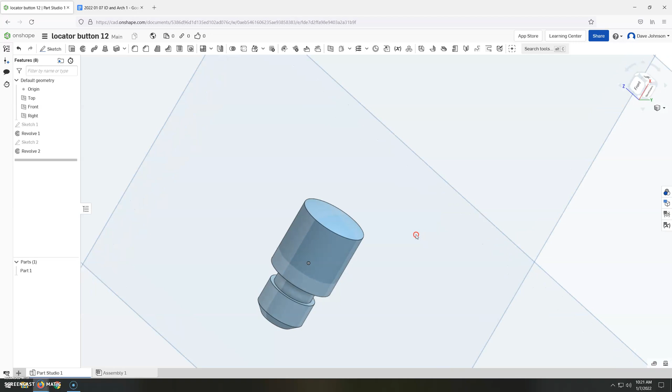So when you first start drawing it, if it looks small, that's okay, just zoom in. But let's take a quick look at our dimensions here. Now this is a cylindrical part, so when we draw it, we're actually only going to draw half of it, along the center line. We're only going to be drawing the outside portion, none of these internal lines. So basically, if you just follow the outside profile, we'll draw that, and then we use the Revolve Tool. Let's see what that looks like in practice in OnShape.

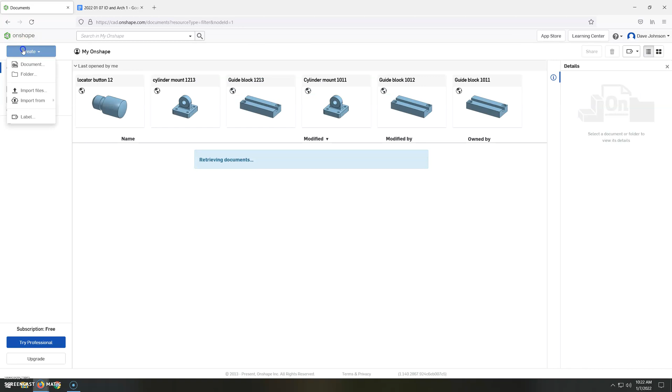So if we go back to OnShape, we'll create a new document. Locator button demo.

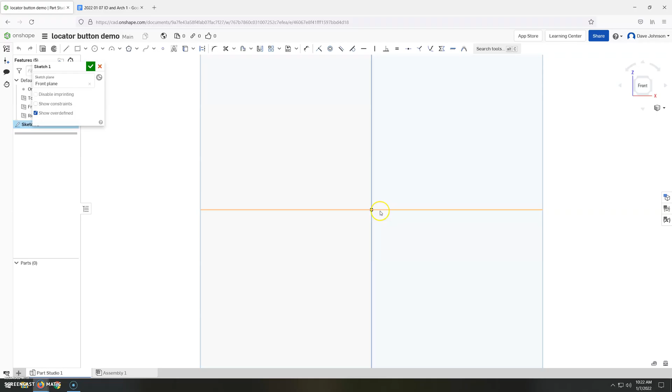Alright, I'm just going to start drawing this right on the front plane. New sketch there. And I like to actually, this one in particular, we're going to line up with the origin point here, but we'll do that kind of after we do our initial drawing.

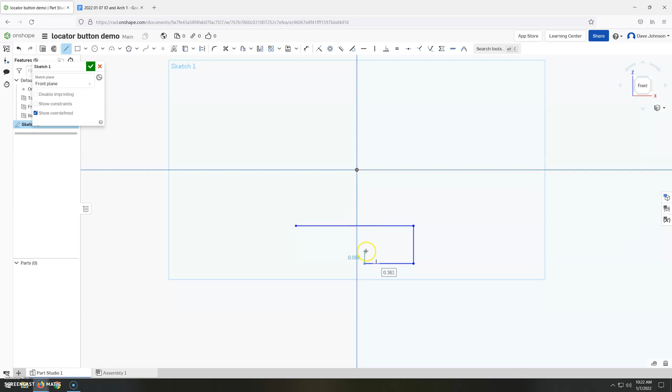So I'm just going to start by just drawing a line, and we'll draw a short line down. I'm kind of drawing this roughly to scale, but you don't have to. Just be aware of accidentally lining up with your origin point here. That's why we're doing this up here for now, and then we will kind of fix things later on.

Go here and here, and we'll come up at an angle, and we'll go straight up. Obviously, I've got a little bit of extra material here. We can just kind of snip that off with the trim tool.

Okay, and then we'll just start dimensioning this. You'll notice I left the curve off the end. We're actually going to add that as a secondary revolve.

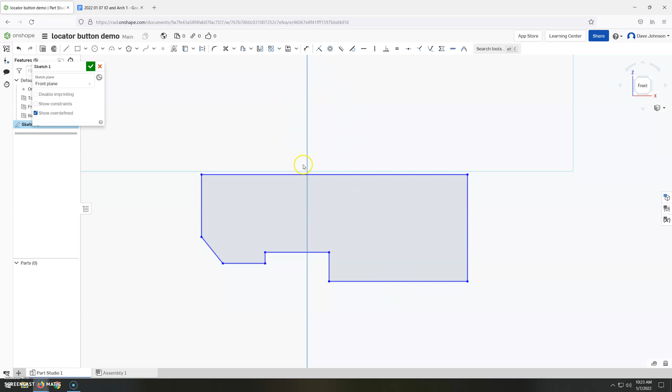So let's start dimensioning this. So our total length here is going to be 7/8 of an inch, and we can get that from this part of our drawing.

Now, the diameter of this whole thing is 1/2 inch, but we're only drawing half of it, so each of these numbers, 1/2 inch diameter there, 5/16 diameter there, 3/8 diameter there, each of those numbers we need to cut in half to give it a radius.

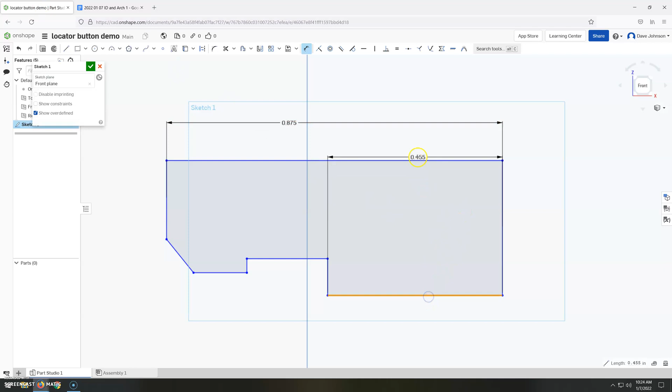So we'll just enter some of those fractions. So here to here, 1/2 of a 1/2 is 1/4, 0.25. Right here, this is going to be 5/32 of an inch. And then that last one is 3/8, so that's going to be 3/16 of an inch.

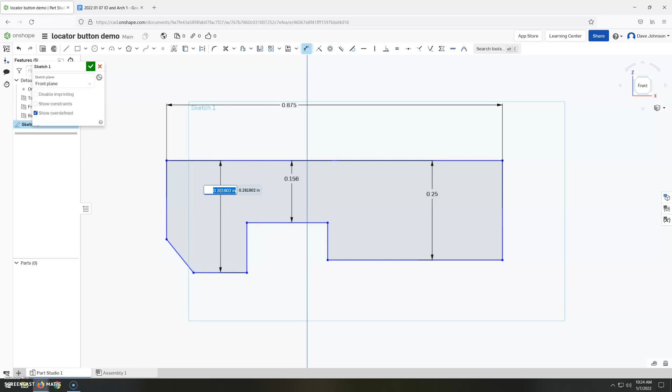All right, you can see that pulled that down. Now, next we want to set this angle. So we look, this is a 45-degree angle, so that means that the supplementary angle to that is 135 degrees, which is much easier to draw than this 45 without a reference line.

So we'll just click this line and then click this line. And what happens is when angles are not collinear or perpendicular to each other, we get this little angle measurement, and we can set that to 135.

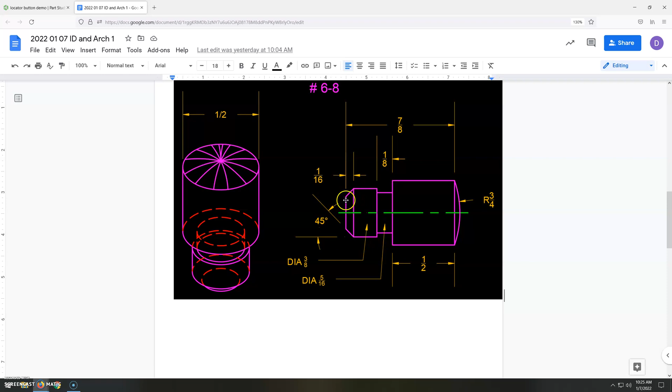Okay. Now we're going to set our distances left to right. So we'll start off with 7/8 inch, and then we've got 1/8 of an inch in this middle segment here. There's nothing here. However, we have 1/16 on our tapered segment there. So 1/2 inch, 1/8 of an inch, and 1/16.

So here, this will be 1/2 inch. This will be 1/8 of an inch, 0.125. We don't know the length of this line, but what we do know is from this point, not line, to this front edge line is 1/16. Okay, and that sort of sets everything up. Everything is locked in now.

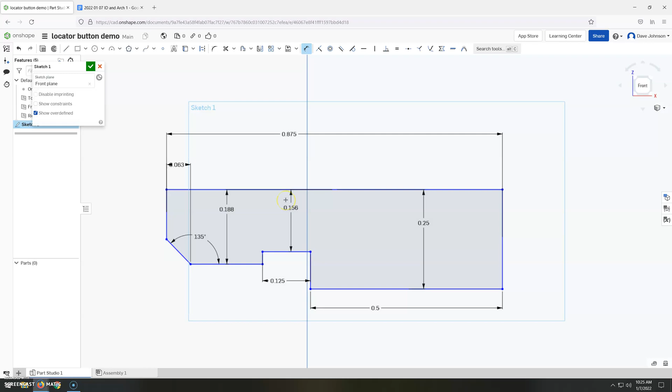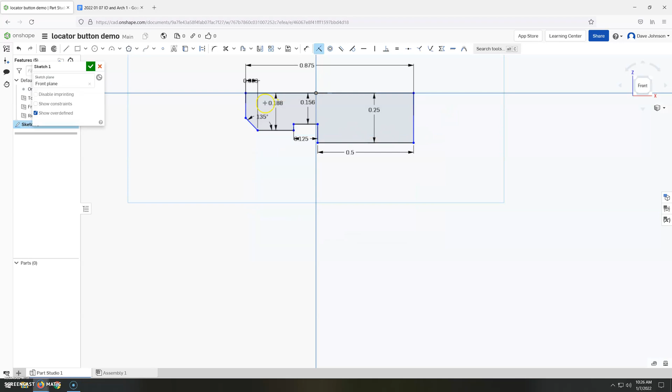Like I said, we want to kind of move this up to our origin point here, so we're just going to grab this. Actually, a better way to do it is we're going to use a coincident constraint here. We're going to say this line is coincident with this point. We'll see that moves up. All right, very good.

And everything is set now. All right, so now what we can do is finish that sketch. We'll zoom out just a little bit, tilt it. Then we're going to use our Revolve tool, so that's to the right of extrude. It looks kind of like a donut.

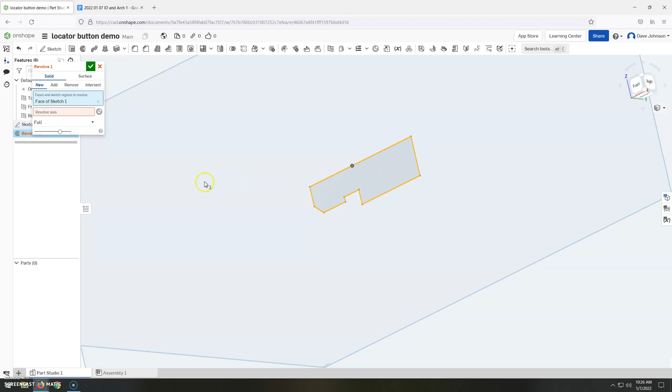We'll click on it. It says select faces and regions to revolve, so we'll click that face. It says revolve axis, we'll click on that, that way it's not red anymore. It turns blue. We're going to click that middle line that goes right through the middle. And we can see a little preview of our revolve. That looks good, it's solid.

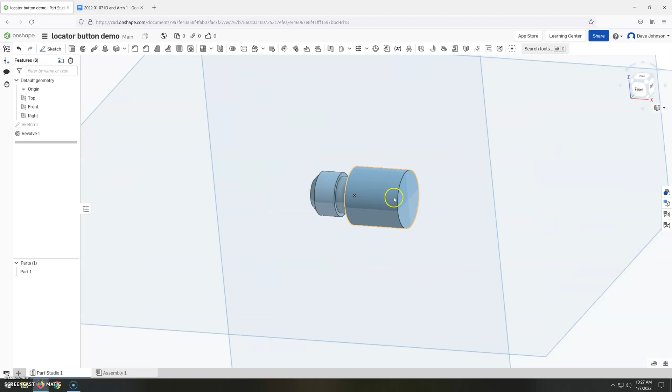Done. Now, here's where drawing this on the origin really helps us out. We're going to draw another sketch on the front plane. Click on our front plane, new sketch. Okay, we're going to draw half of that curve. Being able to kind of use the origin as an alignment point is quite helpful.

So we're going to hit the use button. We want to use this edge and this edge, so these two. We're going to be referencing, we're going to put our arc somewhere about here. We're just going to draw a line off the midpoint there, just go up. Again, any distance doesn't really matter. Then we're going to put a 3-point arc in there. So 1, 2, and 3.

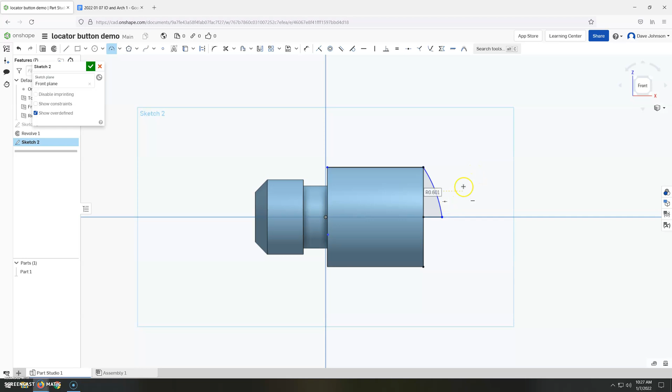We want it kind of close, it doesn't need to be perfect. Okay, and we will dimension this to our radius of 3/4 of an inch. You see that doesn't quite look right. If I were to revolve that right now, it wouldn't be very smooth. And that's because our center point is not aligned with our center axis here.

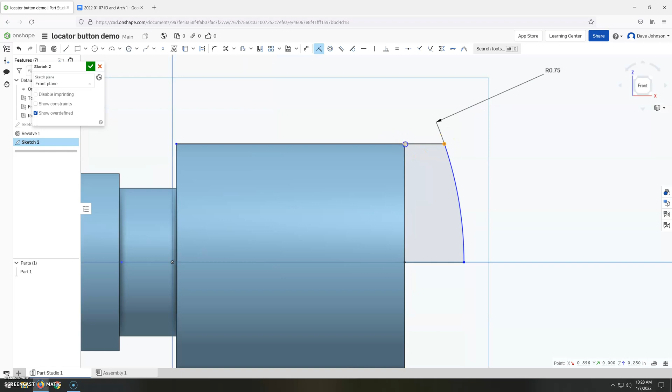So that's actually what we really need to do here. So we're going to say coincident, our center point is coincident with this line. We see that brings that up. So now all we got to do is eliminate this little chunk of a line here. So we're going to say okay, you go here with coincident again. And now we've got a nice closed profile.

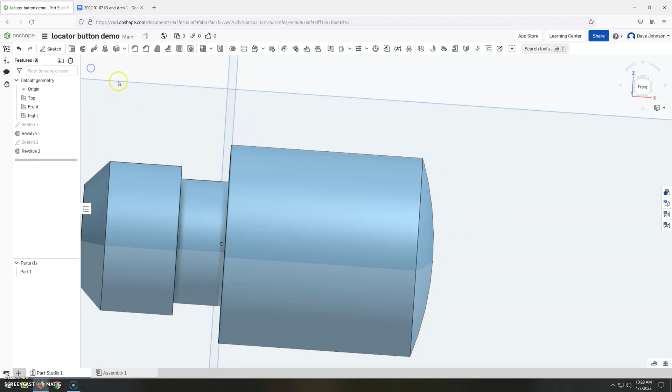We'll finish our sketch, and we will revolve that. Same process, we're going to make sure we're clicking add. So we select our profile there, and then click on revolve axis and click that center little line there. You can kind of preview it, make sure that's looking like it's going to create a nice little dome shape. It is. And there is the locator button.